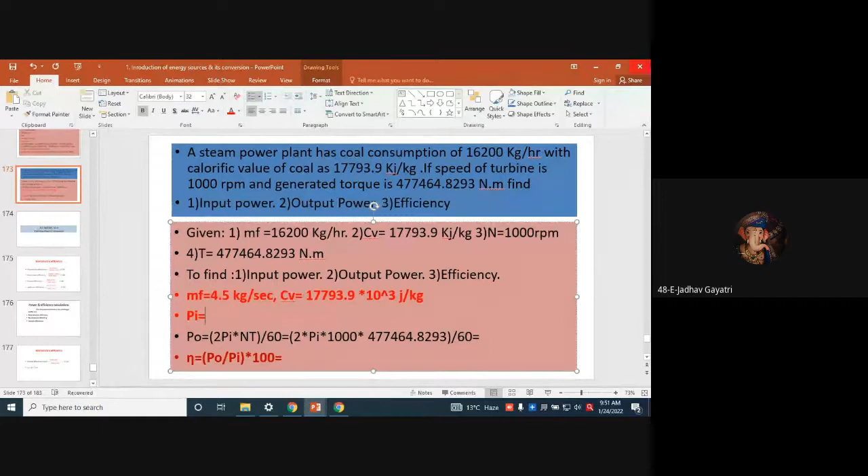So shall I expect PI from you? How much is it? How much PI is equals to... 80.07 into 10 raised to minus 6? Absolutely not, minus 6, how is that possible? 80.072 into 10 raised to 5. 10 raised to 5 or 10 raised to 6? 6, sorry. Okay, so it is 80.0725 into 10 raised to 6.

Who's there, tell me your name. Is the Siley answer right? Jose, Siley, good Siley, PI equals this. Very good Siley. So for output, we have the formula power is equals to 2 pi T upon 60.

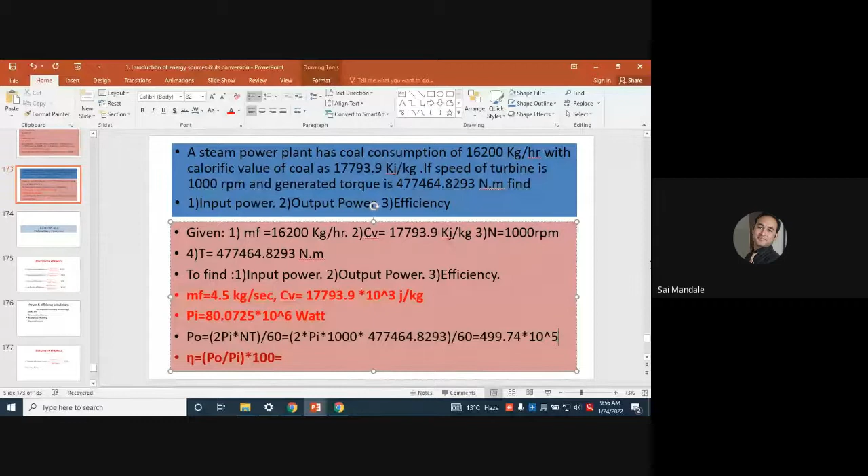Please give me the answer. Nobody. Hello.

Gaurav Handge is saying 499 point something into 10 raised to 5. I have done my calculations already. Please tell me the answer. You are up to Gaurav.

May I know other active participants who are there? Vaibhavi Kabade, Kiran Raut, Jayashree Nifade, Sonone Sneha, Shreya, Rahul. Okay, Kiran Raut.

Kiran Raut is saying 5 into 10 raised to 7. The answer with me is into 10 raised to 6. That is the answer with me, same as Kiran's. 5 to 10 raised to 7 means 50 into 10 raised to 6 watt, which is the perfectly right answer. Very good, Raut.

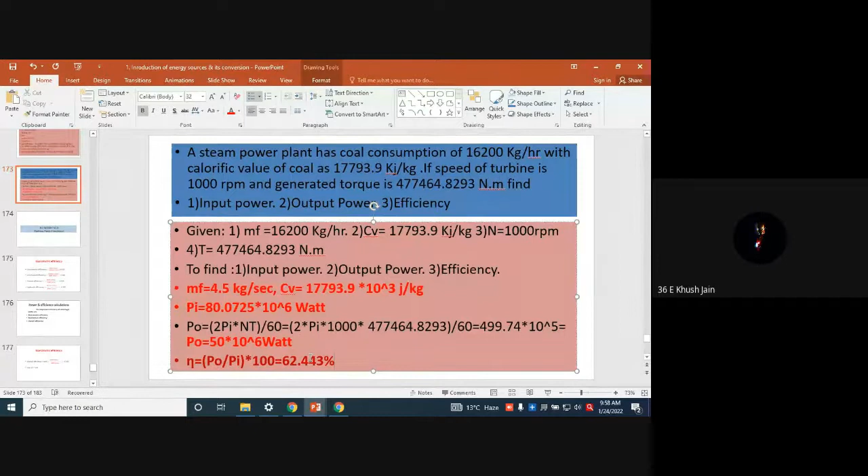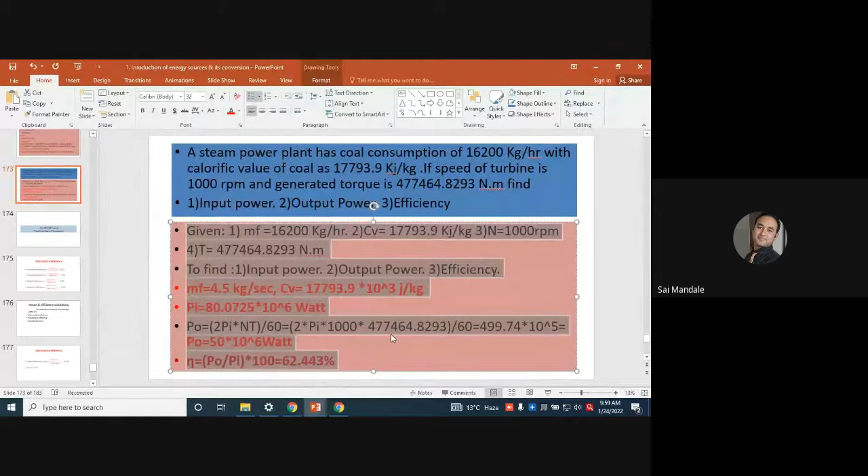Okay, so I guess this numerical is clear to each one of you. Is the numerical understood by everyone? Yes, sir. Okay, great. So now we are moving toward the

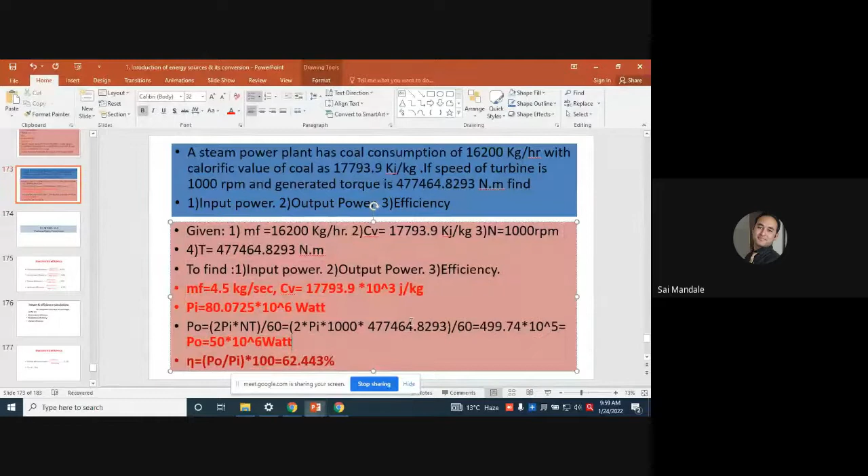next variety of numerical: numerical based on turbine, pumps, and compressor.

So again, just like the overall efficiency of the thermal power plant, we do have some efficiencies: mechanical efficiency, manometric efficiency, overall efficiency, and hydraulic efficiency. Efficiency is the performance characteristic by means of which we can measure the performance of any device. Take the example of hydraulic efficiency.

In case of hydraulic efficiency, the hydraulic efficiency is for the hydraulic turbine. The turbine or runner is rotating, or turbine blades or vanes are rotating, which are mounted on the runner. So the runner is rotating and developing power. What is the input to the turbine? The input to the turbine is water, in case of hydraulic turbine.

So output upon input is the basic formula for efficiency. Based on that, the efficiency of the hydraulic turbine is runner output, that is turbine output, over water input. So water power and runner power are the two parameters which act as input and output to the turbine - runner power upon water power is the hydraulic efficiency. Accordingly, manometric efficiency, mechanical efficiency, and overall efficiency of the turbines, pumps, and compressors are calculated.

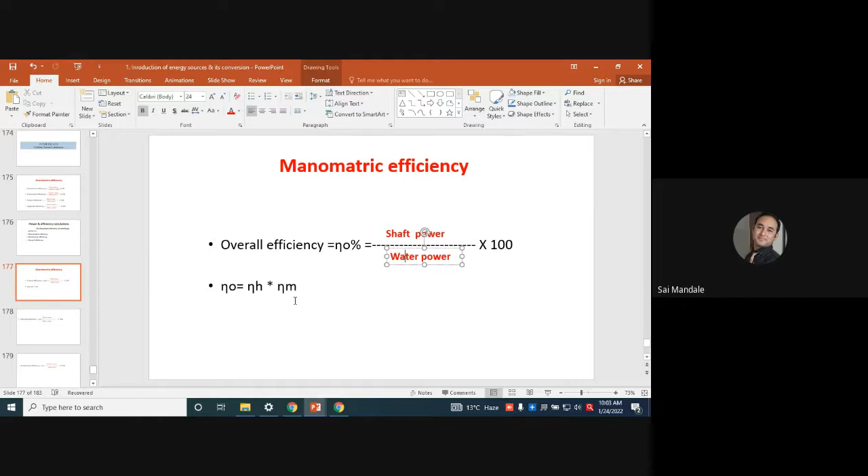How to calculate overall efficiency? This is nothing but the shaft power or output power of the runner divided by water power into 100 - that is the overall efficiency. Or if the hydraulic efficiency and the mechanical efficiency of the turbine is given to us, we can find out overall efficiency as hydraulic efficiency into mechanical efficiency.

So we have two formulas to calculate overall efficiency of the turbine. Either output upon input, if we know the output of the turbine and the water power, we put the value as output upon input into 100 to get overall efficiency. If we know the mechanical efficiency and the hydraulic efficiency of the turbine, we simply multiply hydraulic efficiency into mechanical efficiency to get the overall efficiency.

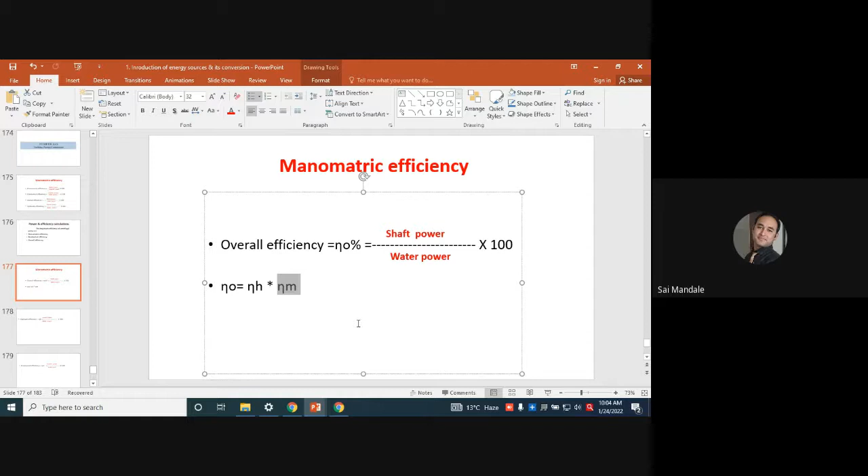So hydraulic efficiency, as I told you, is nothing but the runner power upon water power. Mechanical efficiency is nothing but impeller power upon shaft power. So mechanical efficiency of the turbine is associated with the mechanical component of the pump.

So impeller power, the RPM developed by the impeller, that is output, and the input is the shaft power which is connected to the pump. So impeller power upon the shaft power is nothing but the mechanical efficiency.

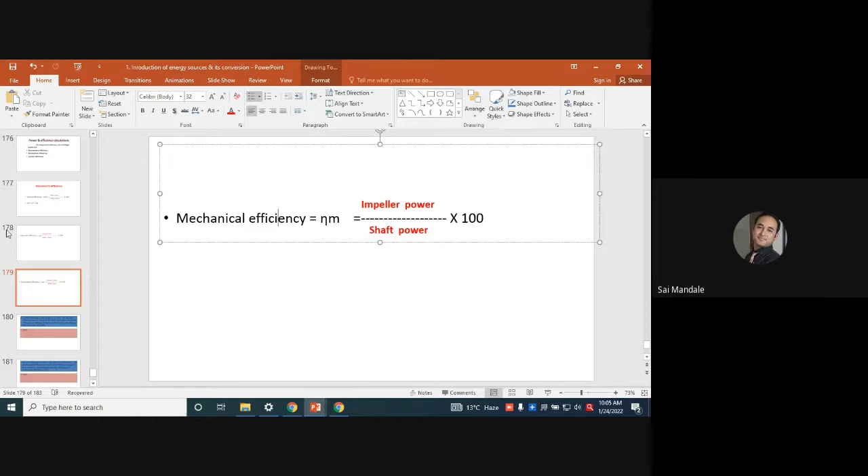Only these three formulas are very important. Based on that, we have to solve the numericals. Let us look at one simple numerical that will help give you confidence.

Okay. Let me switch to the... very easy.

Now, when we are looking for the hydraulic power plant, the turbine which is used is a Pelton wheel turbine. The jet is bombarding on the vanes and the runner is rotating. In that case, whatever turbine we have seen, it's a Pelton wheel turbine, which is a hydraulic turbine.

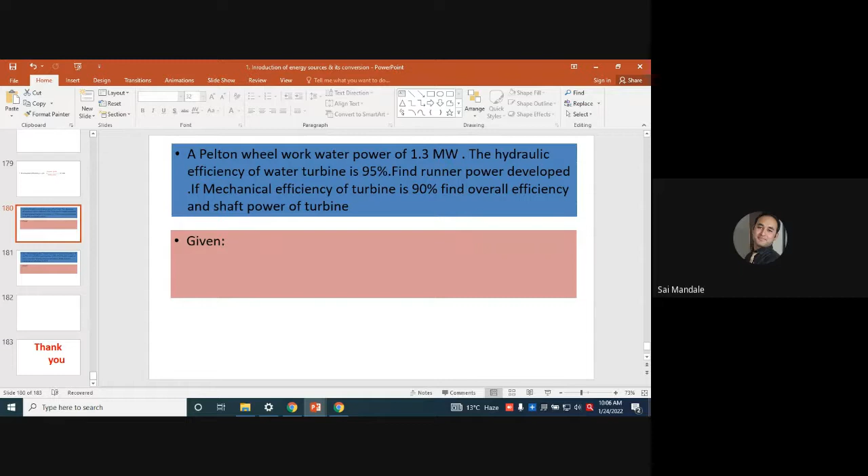Okay, let us have an overlook of the numerical. A Pelton wheel works under a water power of 1.3 megawatt. So water power is given to us as 1.3 megawatt. So 1.3 megawatt means how much kilowatt?

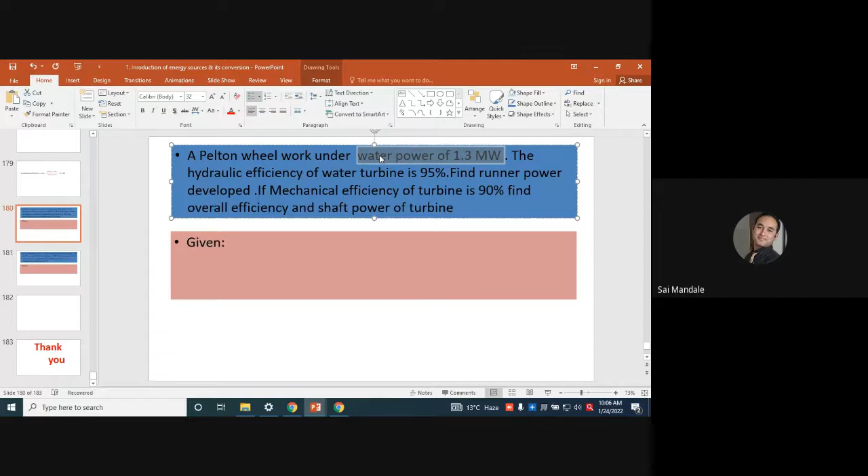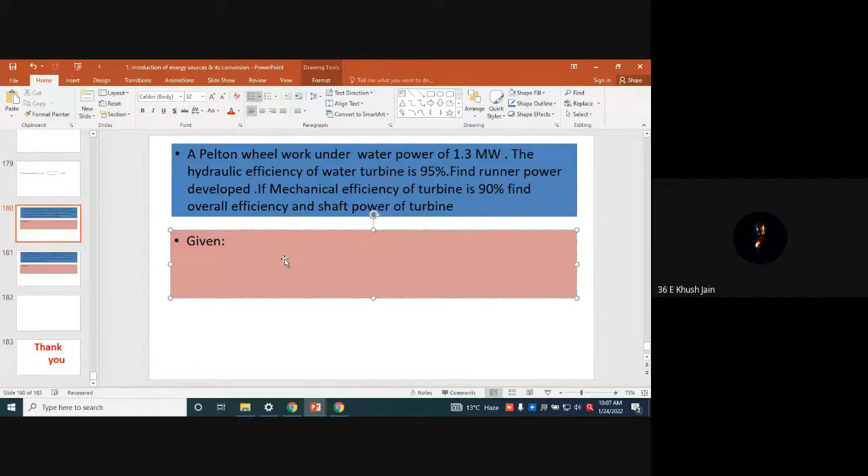1.3 megawatt means how much kilowatt or how much watt? Can anybody tell me? 1.3 into 10 raised to 3 kilowatt. Yes, and in watt it is 10 raised to power 6. Very good, nice, so you're very much aware of this. So the first thing is given to me, so I have just copied and pasted it for my simplicity.

Second, the hydraulic efficiency of the water turbine is given to us. Hydraulic efficiency of the water turbine is 95%. Simply, the hydraulic efficiency is also given to me. It is 95%.

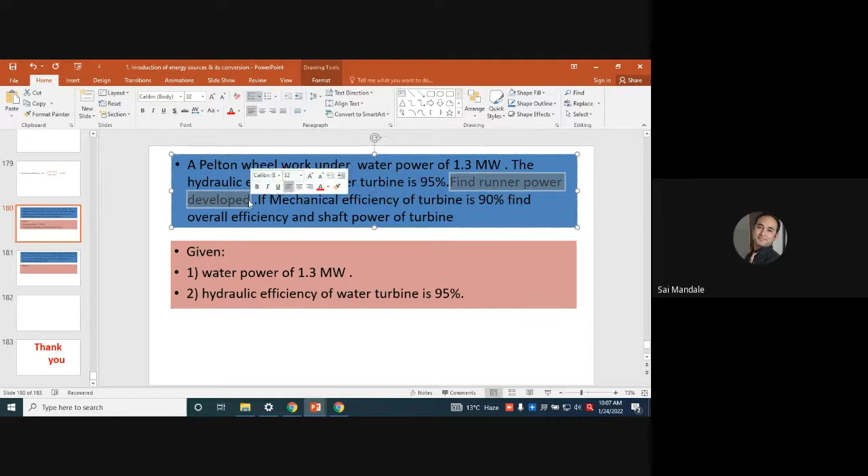Okay, very good. Now, find the runner power. So runner power is to be identified. Let me copy this, go here, paste it, Control V, and let me expand it here to find.

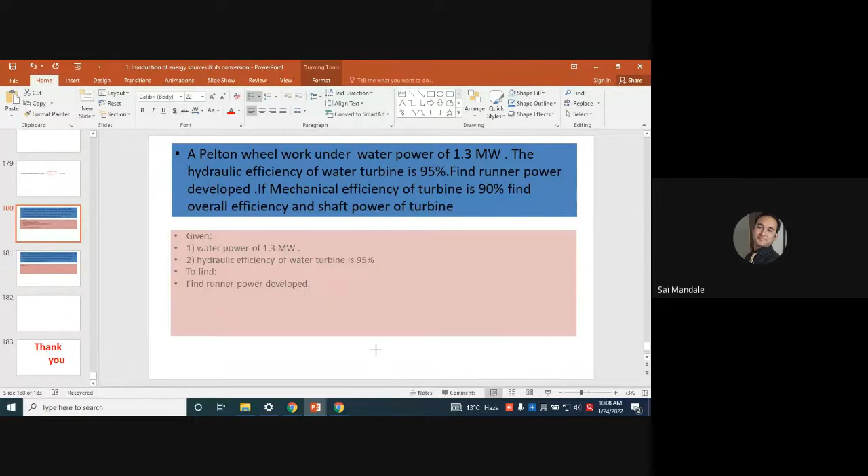First thing is to find the runner power developed, if the mechanical efficiency of the turbine is 90%. Now mechanical efficiency is also given to me, it is 90%. Very good. So the third point is given to me here.

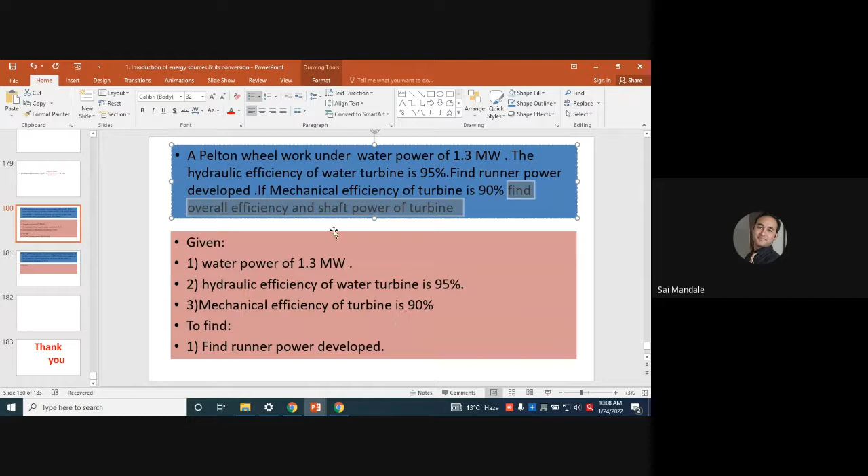Find overall efficiency now, and the shaft power. So this thing is to be calculated - a very simple numerical. They told me to find overall efficiency. So to find overall efficiency, the first parameter... this is the simple statement of the numerical, and from that I have come to know these things are to be identified, and these things are given to me.

Now, how to solve the numerical? Let's have an overview. I know the water power, it is 1.3 megawatt. I know the hydraulic efficiency of the turbine, that is 95%. I know the mechanical efficiency of the turbine, that is 90%. And they told me to identify the runner power developed, so runner power is to be identified. Overall efficiency is to be identified. And the shaft power of the turbine is to be identified.

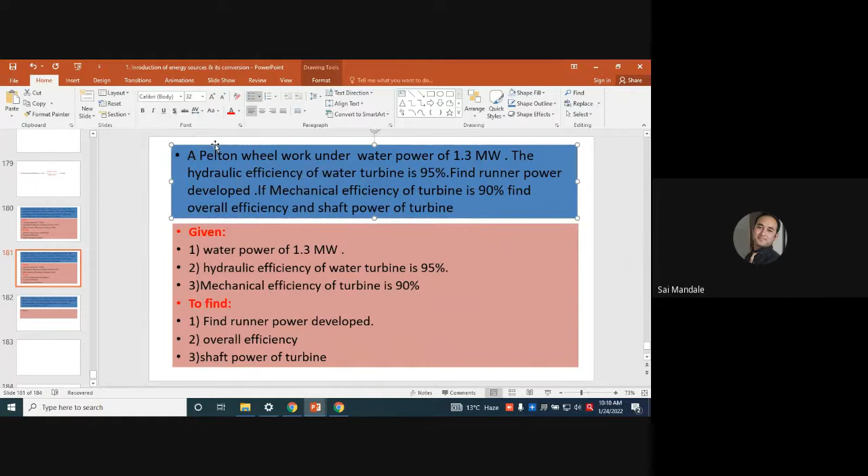Now, if I know the efficiency, say for example hydraulic efficiency is given to me, what is the formula to identify hydraulic efficiency? Let me copy this duplicate slide - the formula to calculate hydraulic efficiency is this, this is the one term. So now I'm coming to the solution.

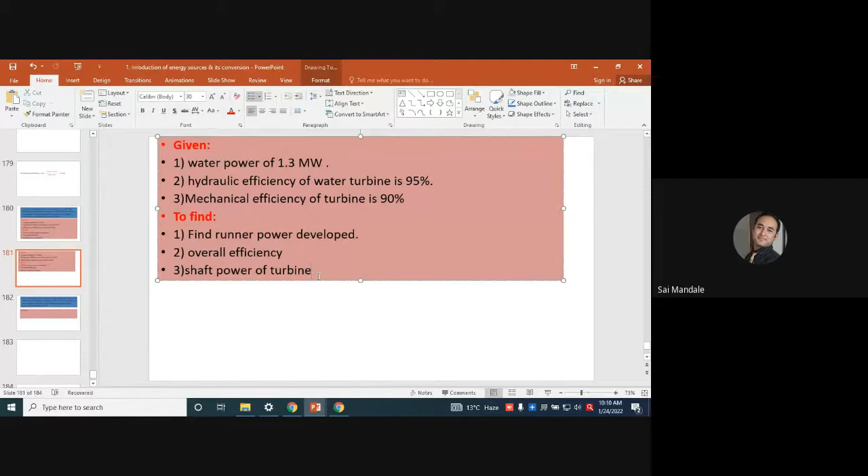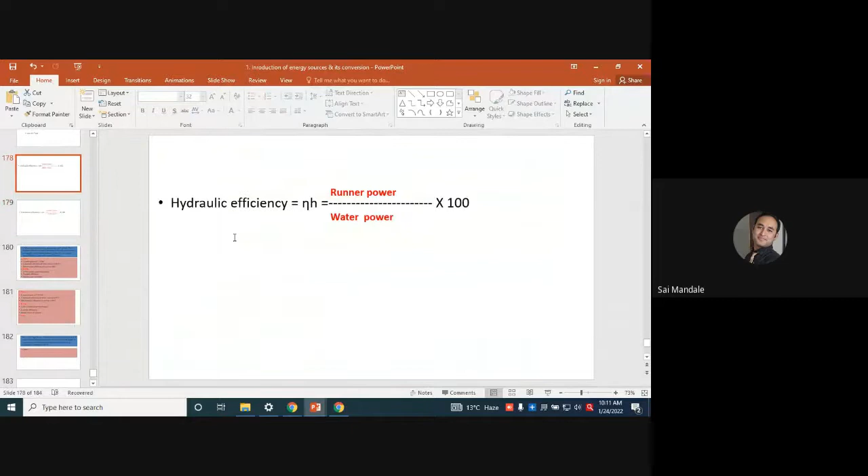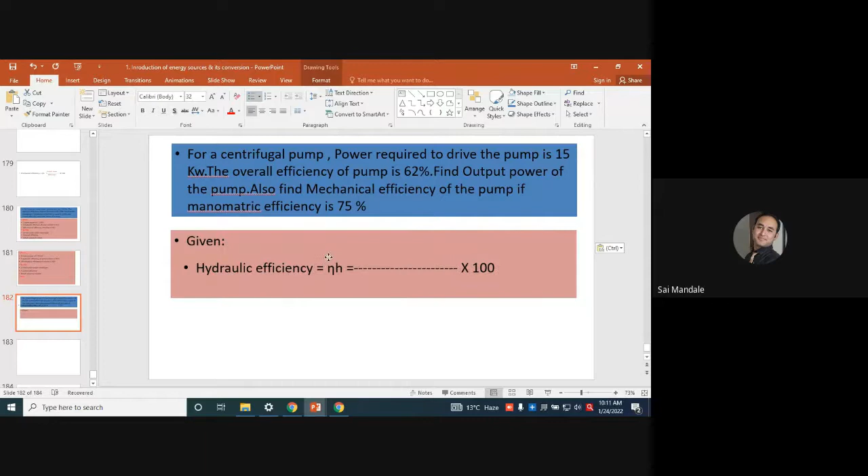Just right now I have given you the formula. What is the formula to find out the hydraulic efficiency? Let me copy and paste it over here.

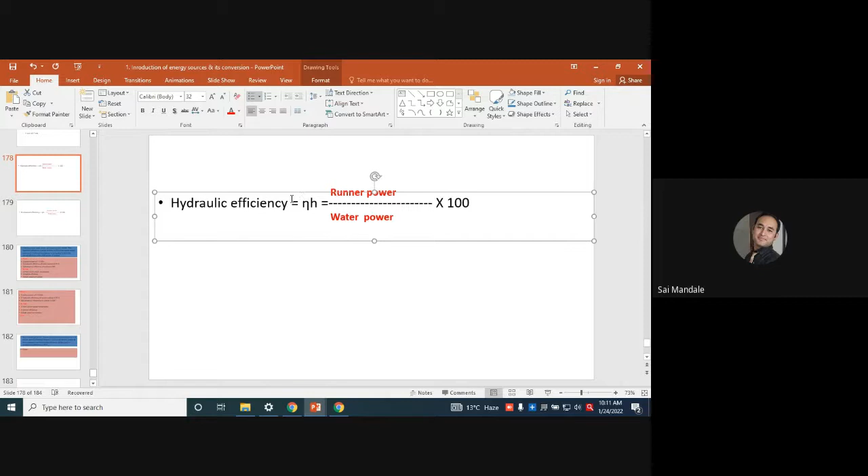I know the formula to calculate the hydraulic efficiency. Let me copy this formula and put it here manually. Hydraulic efficiency is equals to runner power. So I'm writing runner power as RP. Runner power is the RP.

And what is the input? Input is the water power. So what is the quantity? It is water power. This formula is clear to each one of you. And how to calculate hydraulic efficiency? Hydraulic efficiency is nothing but the output upon input.

Again, what is the output? It rotates the turbines, so runner is rotating. So runner power, RP stands for runner power, which is the output. Water is supplied to the turbine, so water power is the input.

Now what is given to me? Hydraulic efficiency is 95%. So if I put 95 over here, runner power is to be identified. Water power is given to me, WP. See, it is equals to WP. So WP is given to me. Hydraulic efficiency is given to me as well.

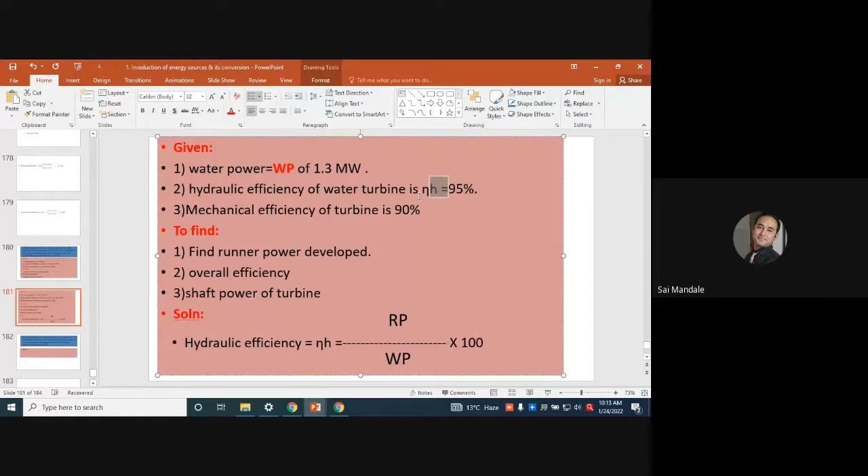So if I know hydraulic efficiency, if I know water power, is it possible for me to calculate runner power? Are you getting my point? Okay, so I know hydraulic efficiency is 95%. I know water power, that is 1.3 megawatt. So if it is in 1.3 megawatt, I have to convert it into watt, so it is 1.3 into 10 raised to 6 watt.

So 95 is equals to runner power to be identified divided by water power, into 100, where water power is 1.3 into 10 raised to 6. So is it possible for you to identify RP? Yes, you can. So can anybody give me the answer for runner power?

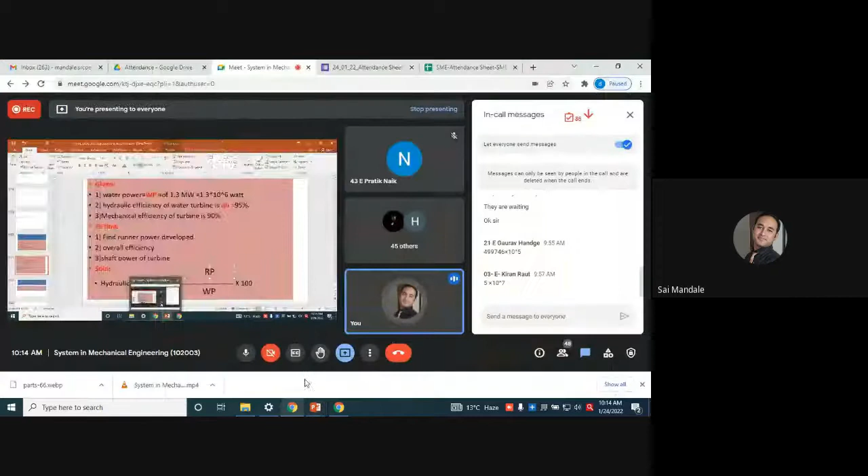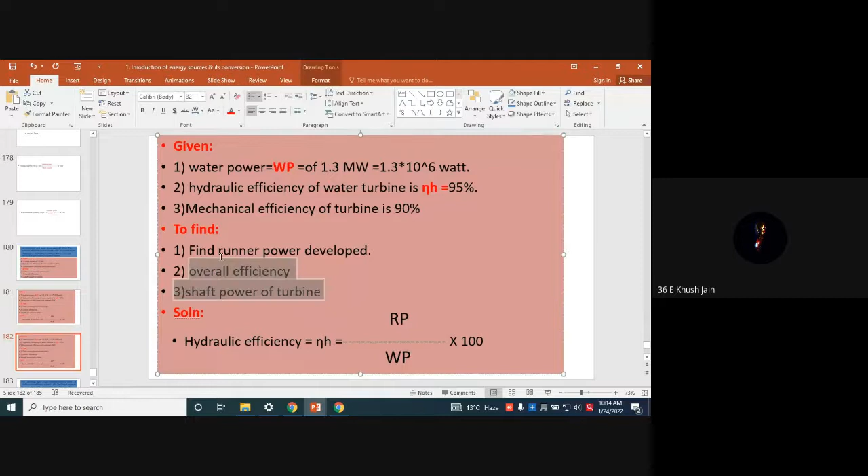Sorry, you're not audible. Who is there? We are not going to calculate this in percentage, it will make no sense. Hold a second, let me remove this solution and come here, let me put it over here.

RP, this is my water power. Now tell me, so it is 95. 95 is equals to RP, not given to me, so it is RP as it is, divided by water power which is 1.3 into 10 raised to 6, into 100. So RP is equals to how much?

It is 95 into 1.3 into 10 raised to 6, divided by 100, is equals to RP. Am I right? You have to do this. Now tell me the solution, tell me the answer. 1.235 into 10 raised to 6.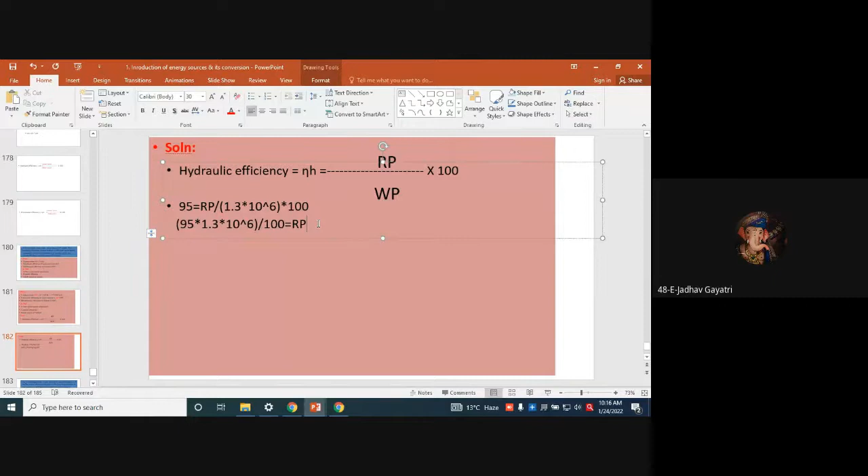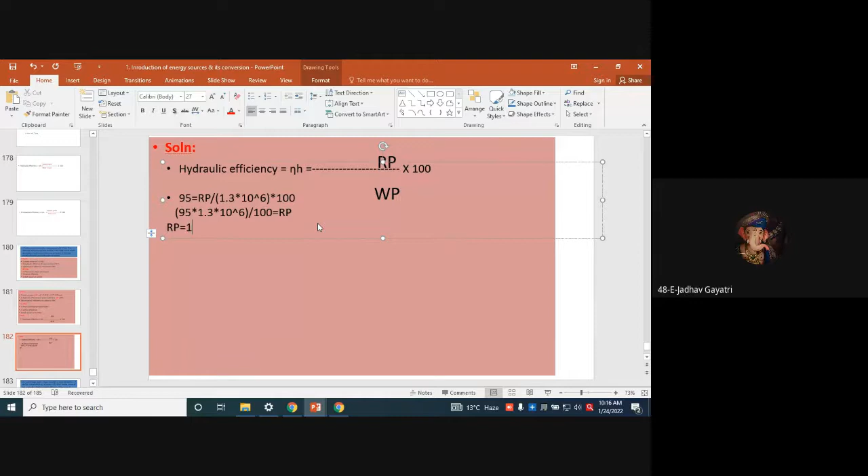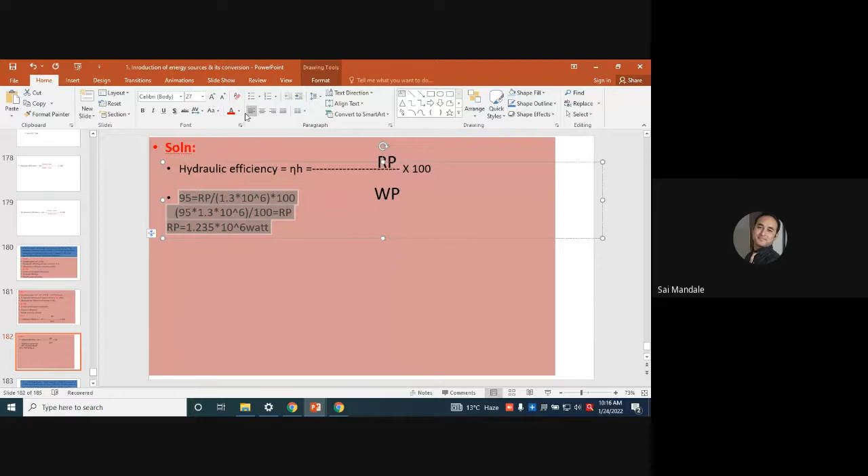Perfectly correct, very good. Who is there? I guess Saili, Gayatri. Surname Jadhav, Gayatri. Very good, Gayatri. 1.235 into 10 raised to 6 watt is the answer. So this is the answer.

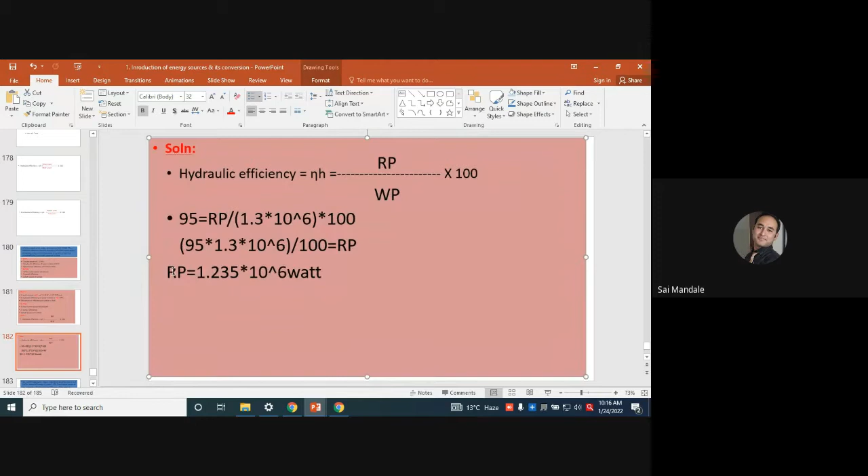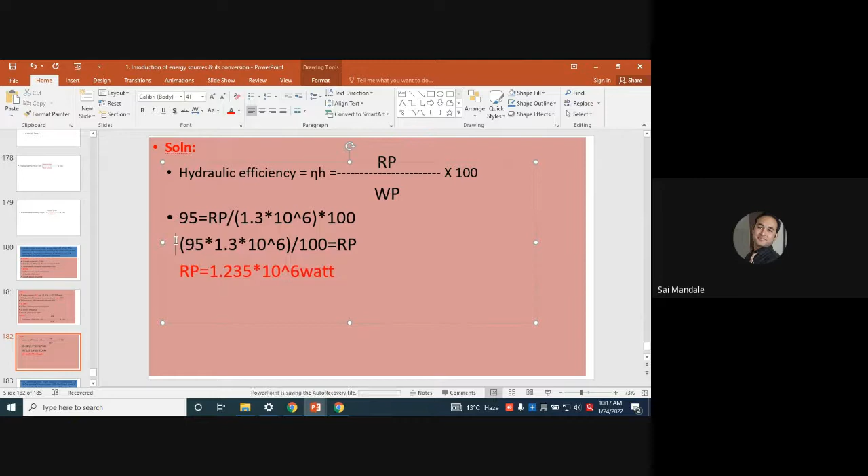Everybody, please try to understand these things. Very simple numericals, only little bit of rearrangement is there. So this is the first answer that we are expecting. So they asked me to identify runner power developed, and the answer is with me: runner power is 1.235 into 10 to the 6 watt, or you can write it as 1.235 megawatt. Simple.

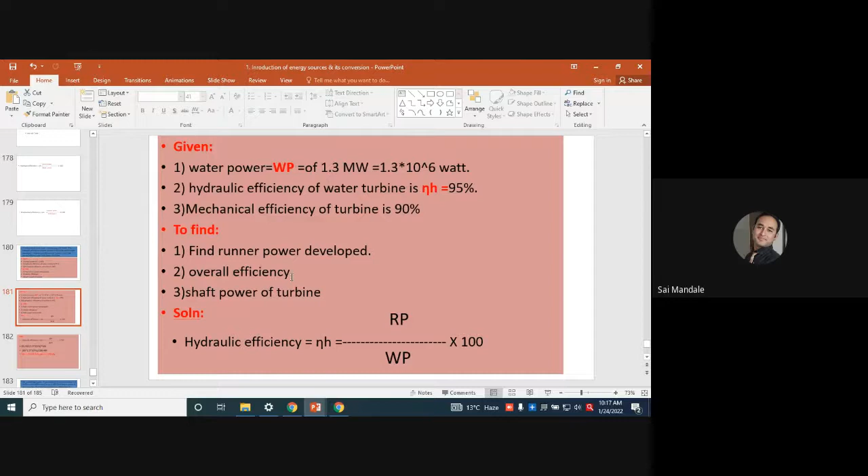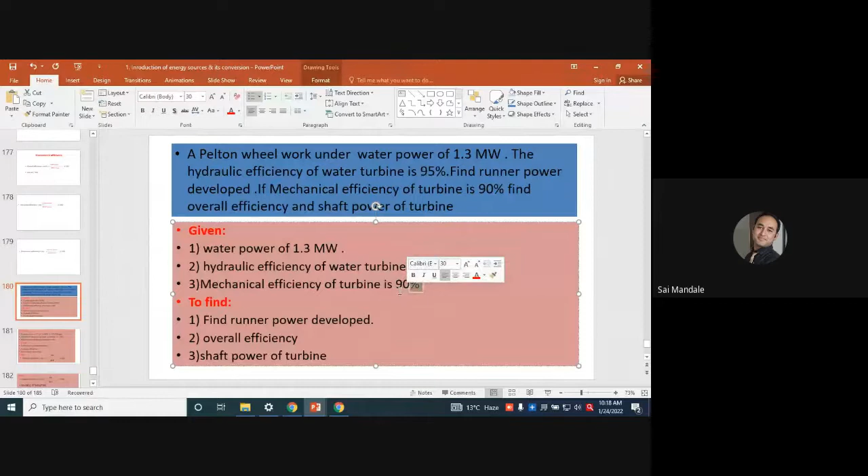Okay, the second term they asked me to identify is overall efficiency. We do have a few formulas for overall efficiency. Formula number 1 is shaft power upon water power, and formula number 2 is overall efficiency equals hydraulic efficiency into mechanical efficiency. I guess hydraulic efficiency is given to me and mechanical efficiency is given to me, so it is very easy for me to identify the overall efficiency. So let us move towards the calculation of overall efficiency.

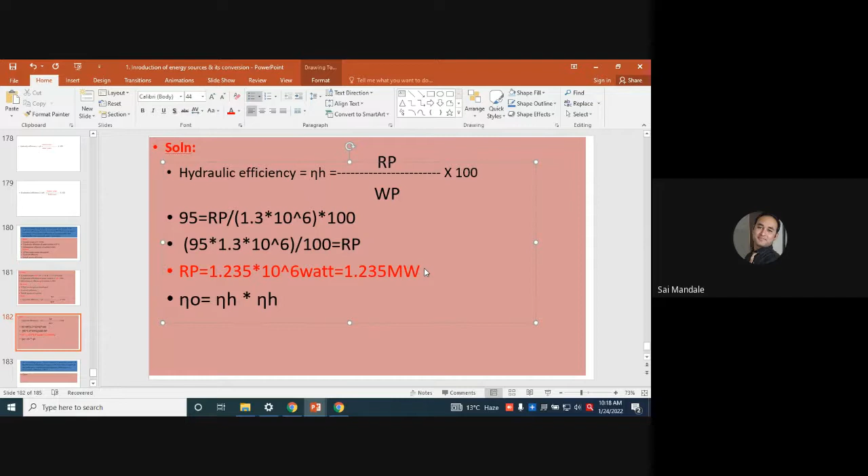Let me write it down over here. Copy, paste. So overall efficiency is equals to hydraulic efficiency into mechanical efficiency. Hydraulic efficiency is 95%, meaning 0.95 - it is in percent, no? 0.95 into mechanical efficiency is equals to how much? Mechanical efficiency is 90%, so it is 0.90.

So how much is it? Can anybody tell me? 0.855. Very good. Who is there? Ghosh. Ghosh. Very good. Nice, Ghosh.

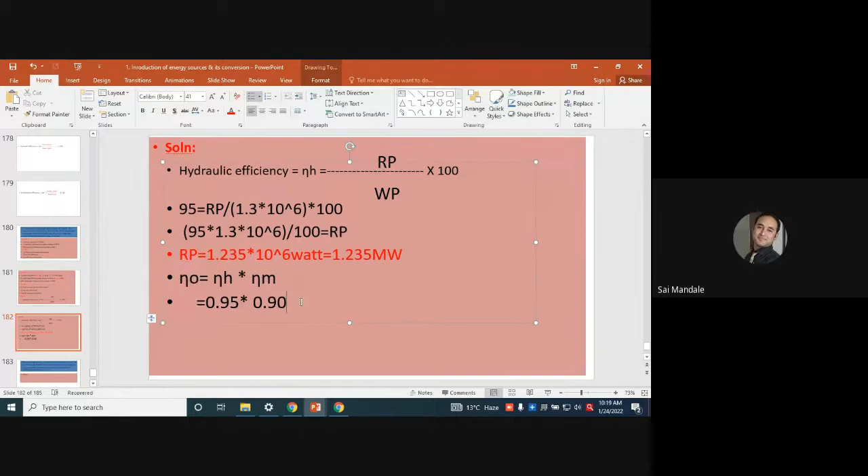So 85.5% means it is 0.855, and that equals 0.855 into 100, means 85.5%. Very good question. Nice.

So this is my answer. This is my second answer. That's my first answer. Very good question. Nice.

Now what is the third question? Is there anybody outside the class? Utkarsha Badhan. Very good. Nice. Then the third, what is the third? Shaft power. So they asked me to identify the shaft power.

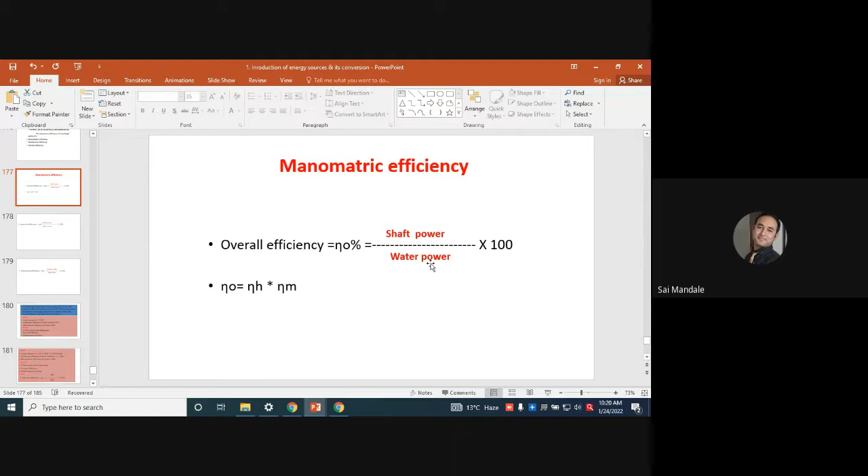Shaft power. Let's move toward the shaft power. So shaft power is involved. Where is shaft power? In case of overall efficiency, the shaft power upon water power is also the formula. So let's use this formula.

Overall efficiency is equals to shaft power divided by water power into 100. Let us put the values.

Hey, hold 1 second. Only 1 second. Hold on.

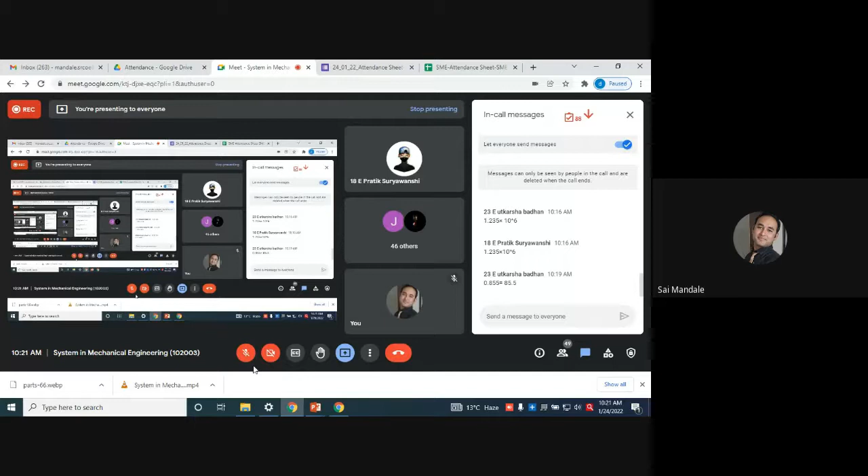We are here. Overall efficiency is equals to shaft power upon water power. What they asked us to identify, they told us to identify shaft power. So let us rearrange the term. So we do have a value for 85.5% is equals to shaft power as it is. So it is shaft power divided by, so water power is how much water power?

It is 1.3 into 10 raised to 6. It is given over here, na? See over here, water power is given. So water power is 1.3 into 10 raised to 6 into 100. Can anyone of you rearrange the term and tell me the value for shaft power?

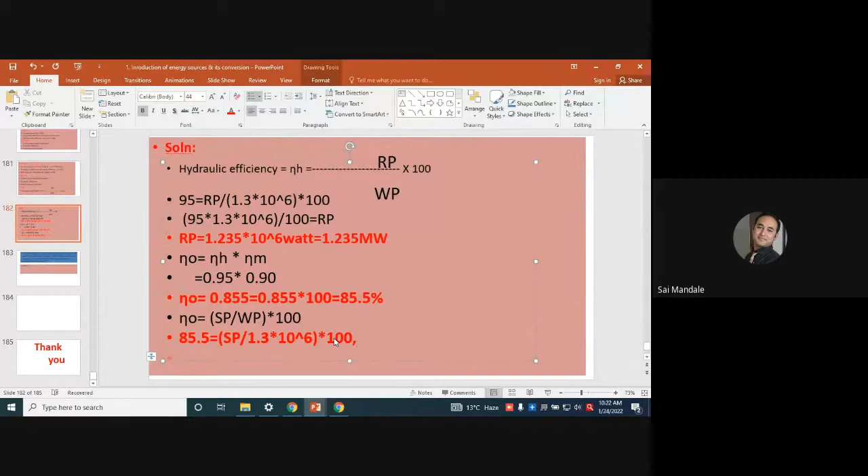111.5, means 1.1. 1.1 into 10 raised to... 1.11 into 10 to the power 10. I guess 1.1115 into 10 raised to 6. Perfectly correct. 1.111 into 10 raised to 6. Yes, perfectly correct. Somebody has given me the answer.

I guess somebody has given me 10 raised to 10. You missed something over there. Try to solve the numerical very easily, very lightly. Please try to understand the terms and their sign convention. Okay. Don't miss. These are very easy topics, very simple topics. So be aware of the calculation.

Yes, we have first answer 1.235 megawatt as the runner power. We have overall efficiency as 85.5%, and we have the shaft power as 1.11 into 10 raised to 6, or we can write it down as 1.11 megawatt. It's okay. So very good, very nice.

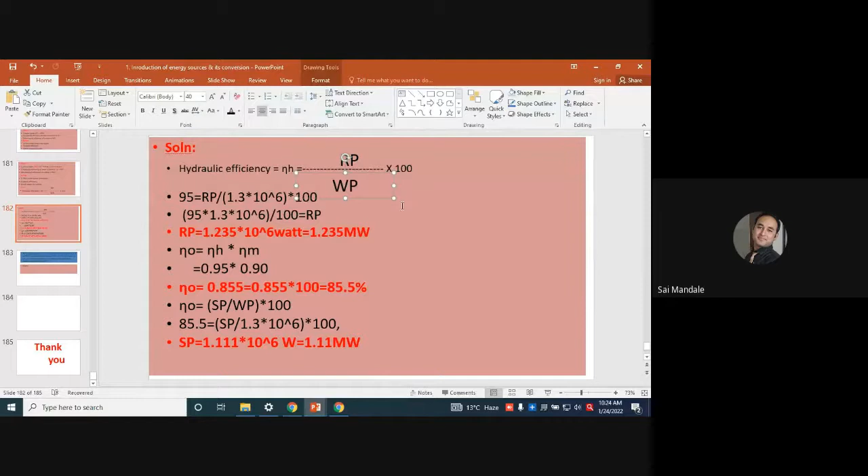So if this numerical is clear to each one of you, please tell me so that I will start the next numerical. And if anybody is having any doubt or query with this, ask me your doubt and query. Sir? Yes, tell me.

Sir, can you please open the first slide of manometric efficiency? First slide, manometric. Okay sir, your overall efficiency formula is water power upon shaft power. Reverse. It is reverse. Now it's okay, yes sir.

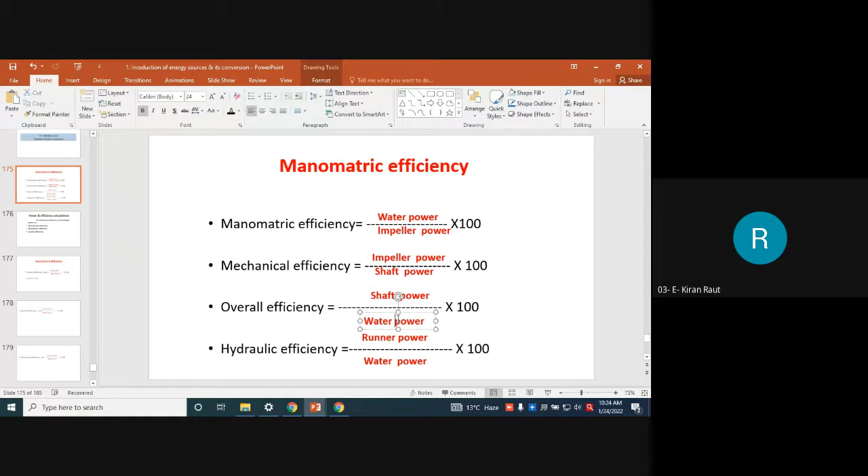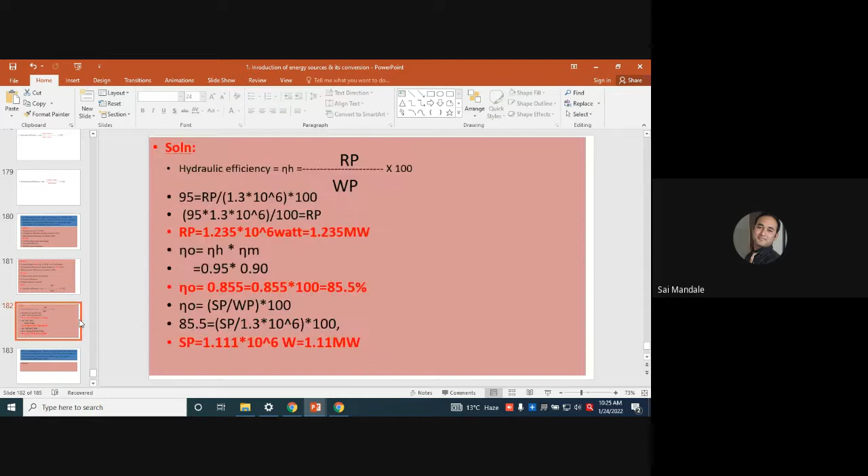Anybody else? Anybody else? Anybody having any doubt, tell me. Okay, so shall I move toward the next numerical? Just tell me yes or no. Yes sir, yes, okay sir. Good to go, good to go now. Okay.

Next numerical is pump. For a centrifugal pump, power required to drive the pump is 15 kilowatt. Let me copy this. Something is given to me: 15 kilowatt, power required to drive the pump is given to me as 15 kilowatt.

The overall efficiency of the pump is given to me as 62%. So second point given to me is overall efficiency of the pump is 62%. Find the output power. So this is to find. Let me copy. It is to find.

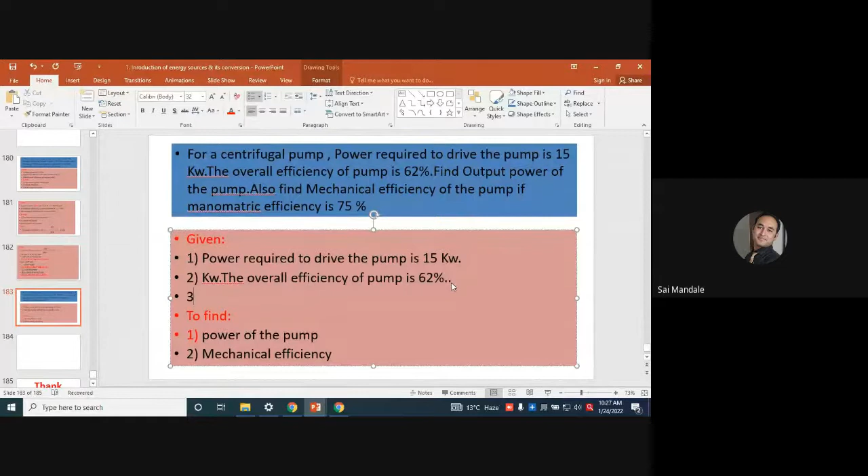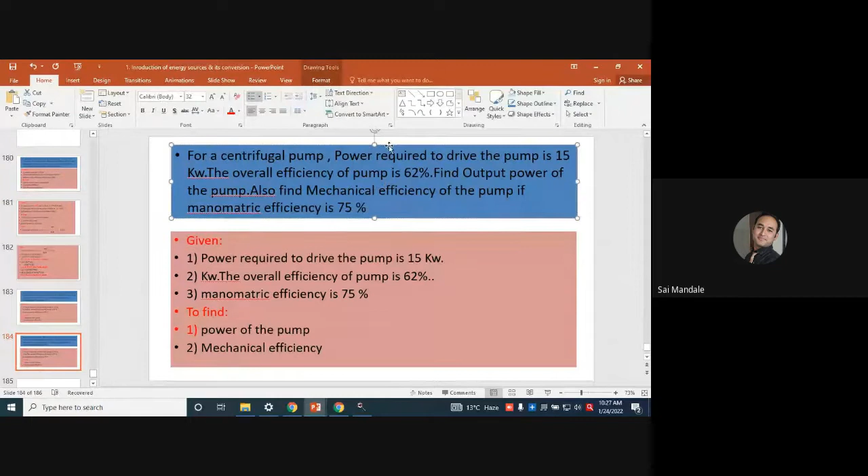Okay, now these things are given to me in the numerical, and I have to identify the unknown parameter from the given parameters. So, solution.

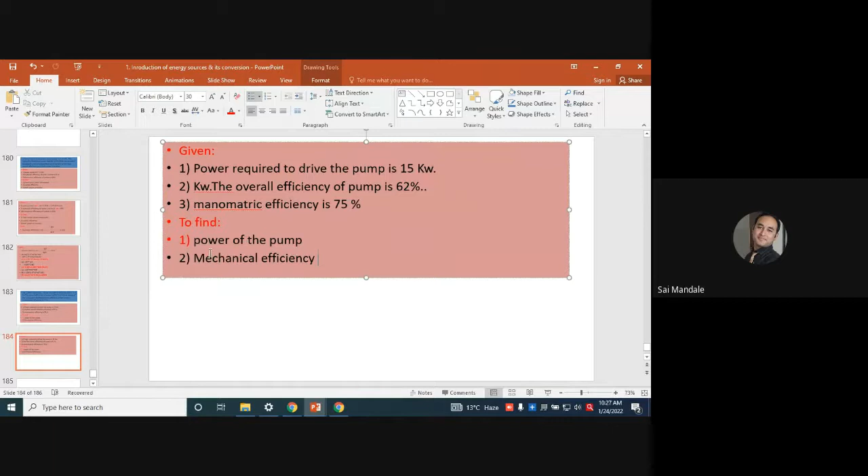Okay, so overall efficiency is given to me. Power required to drive the pump is given to me. The overall efficiency of the pump is given to me. Manometric efficiency is given to me, and they told me to identify the power of the pump. Power of the pump is water power of the pump.

Now, in case of turbine and in case of pump, there is a difference: in case of turbine, water power is an input to run the turbine, and we are getting the shaft power. In case of water turbine, we are using water power to run the shaft. Therefore, water power acts as an input and shaft power acts as an output. But in case of pump, it's different: we are using the shaft power to run the pump, so shaft power is the input and water power is the output. So first I'm using the formula. Let me copy the manometric symbol, overall efficiency, or efficiency.

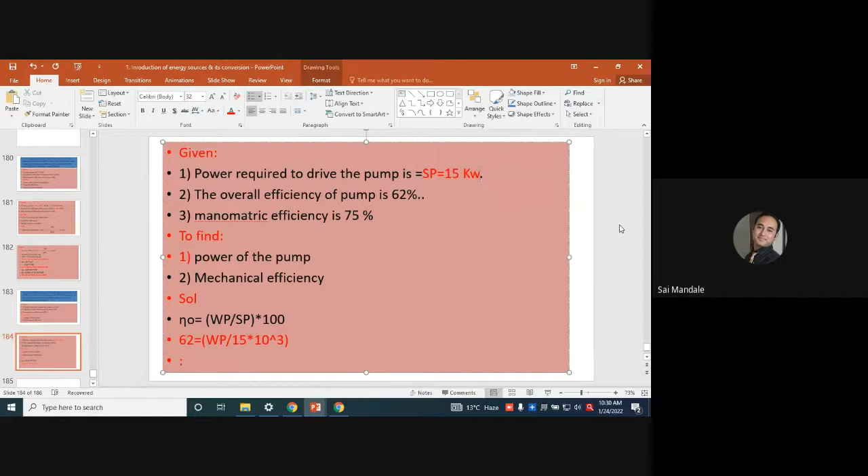Shaft power equals 15 kilowatt. Let me highlight this in red color and put it down over here as 15 kilowatt, which means 15 into 10 raised to 3 watt.

Into 100, overall efficiency equals 62% as given to me. Water power, how much water power the pump can develop, is the WP. Shaft power, the capacity of the pump given to us, is 15 kilowatt, and we need to identify the power of the pump.

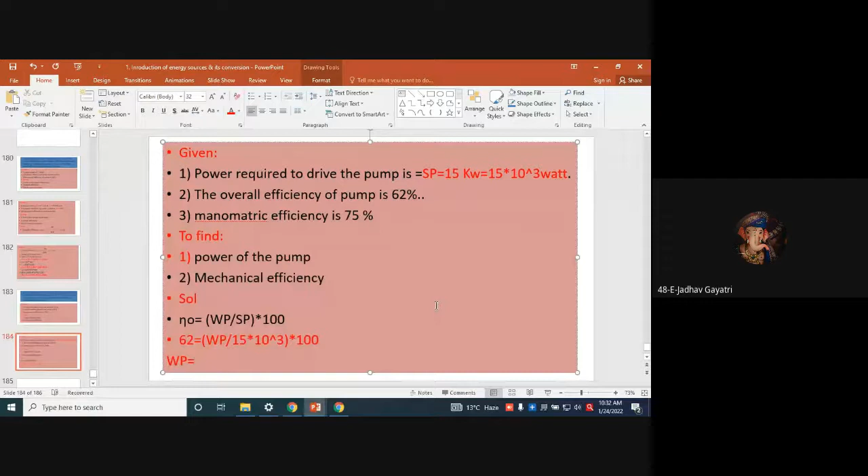So can you identify the water power of the pump? 9.3. Let me check now. 9.3 kilowatt. The answer I have is 9300 watt, that is 9.3 kilowatt. Am I right? Yes sir. So 9300 watt is nothing but 9.3 kilowatt, that is my first answer.

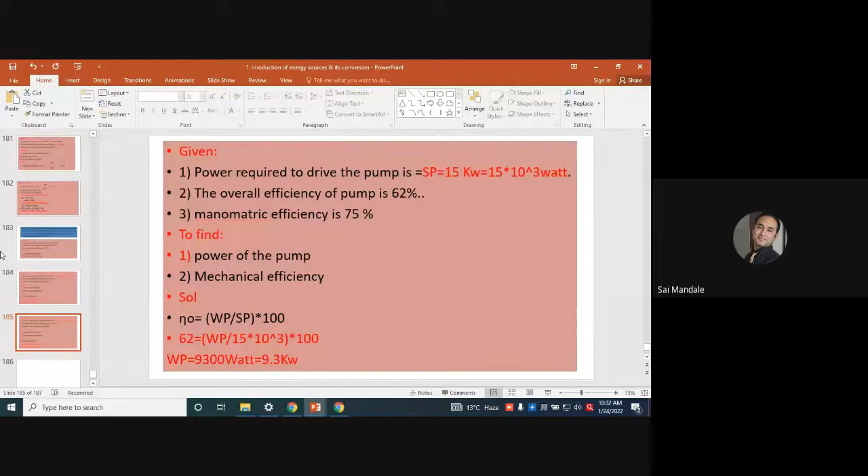Now moving onwards for the next solution, that is the mechanical efficiency. We have to calculate the mechanical efficiency. In case of pump, the mechanical efficiency in terms of overall efficiency is different from a Pelton wheel turbine, where overall efficiency equals mechanical efficiency into hydraulic efficiency. In case of pump it is mechanical efficiency into manometric efficiency, the height it is required to raise.

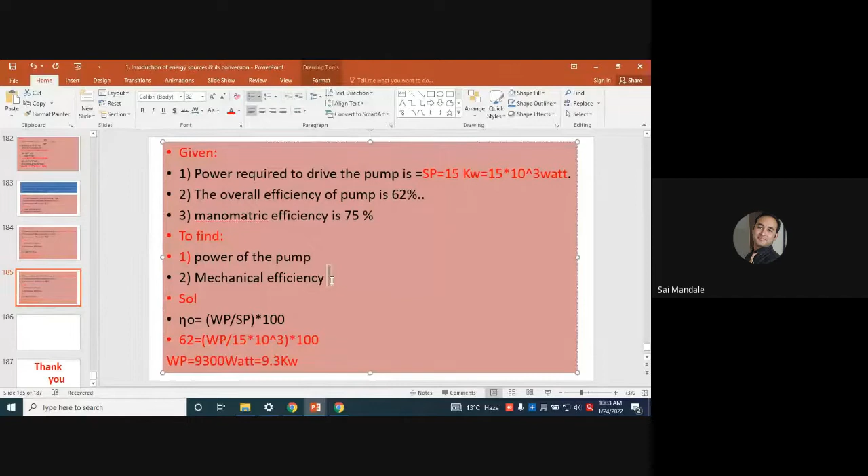So this is the same, let me remove this. In case of pump, the overall efficiency can also be calculated using the formula: mechanical efficiency into, in case of turbine it is mechanical efficiency into hydraulic efficiency, but in case of pump it is mechanical efficiency into manometric efficiency.

So we do have a value for overall efficiency, it is 62%, or we can write it as 0.62 equals how much mechanical efficiency? Mechanical efficiency is to be identified. Let me copy this as it is: mechanical efficiency into manometric efficiency is 75%, so it is 0.75.